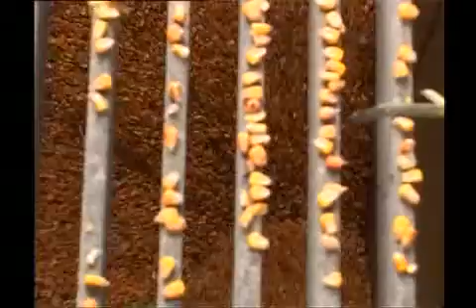Did you know that for more than 10 years, one company has been applying a responsible policy which provides effective responses to post-harvest cereal processing and minimizes the impact of its facilities on the environment, thereby contributing in its own way to controlling climate change?

CFCai, Group CFC, is established in L'Oise, to the north of Paris. Created more than 75 years ago, the company specializes in post-harvest technologies. It currently employs 150 people. Exports account for 30% of the turnover of the company, which is present in more than 70 countries, spread over 5 continents.

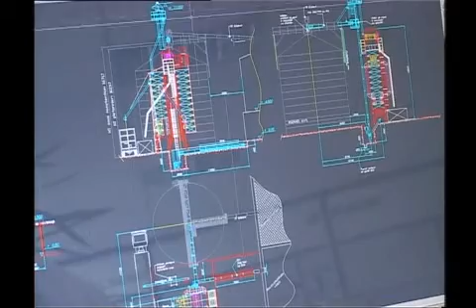Thanks to its in-house design office, CFCai creates all its equipment from design to implementation, without forgetting after-sales service and on-site maintenance. A team of 14 specialist engineers, split between 3 sites, have ensured a close relationship on a daily basis since its creation, responding fully to the requirements of an international clientele.

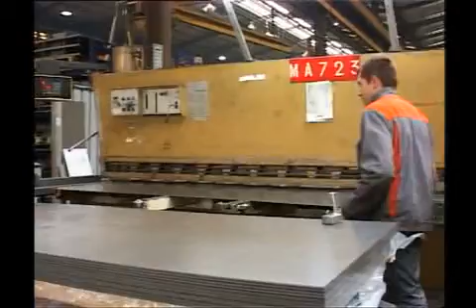Our production site covers more than 10,000 square meters and includes 2 digital control shears with 4-meter capacity, five digital control punches covering a thickness of up to 8 millimeters, six press brakes with 3 to 6 meter capacity, and 1 laser cutter, 8 millimeter thickness, on a 6-meter bench.

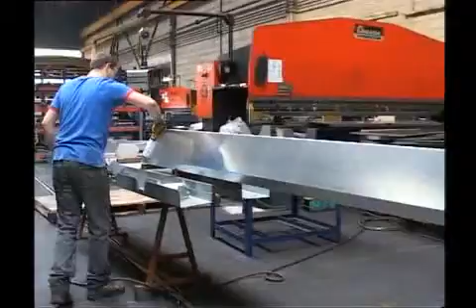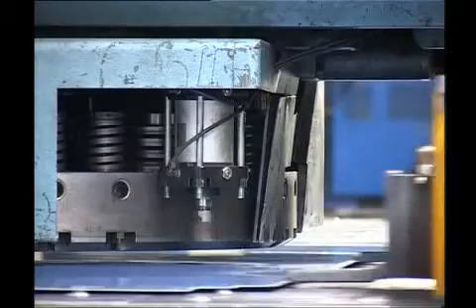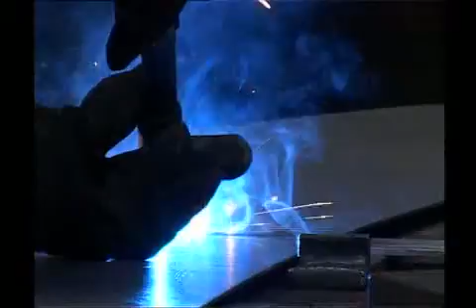Our site also has a TIG-MIG welding line, one grit blasting, pickling, and baked paint line.

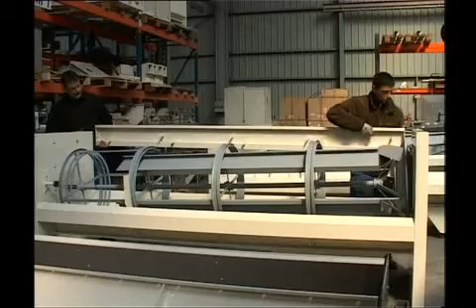But CFCai's know-how does not stop there. The group also has 3 assembly lines at factory outlet, created entirely by its engineers: 1 line specific to the Marot cleaner grader, 1 line specific to the LAW dryer, and 1 handling line.

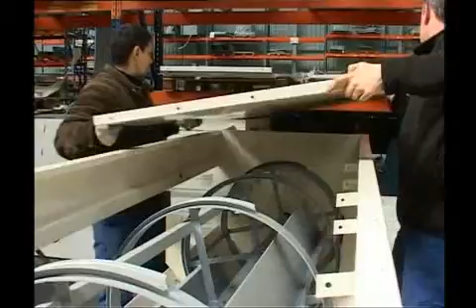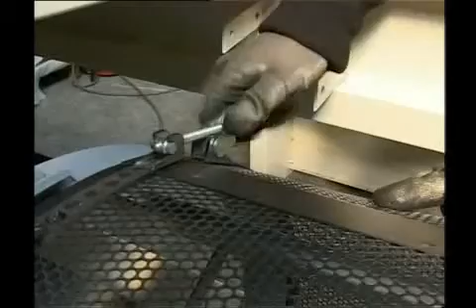Through full control of its production tools, CFCai improves the reliability of all its equipment, which is boosted by the most meticulous quality control before shipment at the end of each line and on each of its machines.

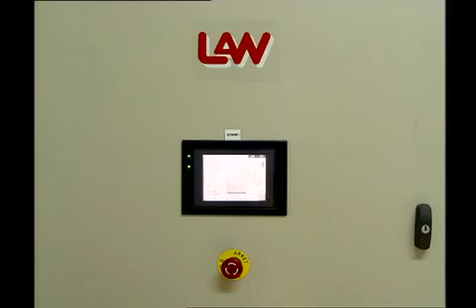To round this off, we can add that the group produces its own automated systems on its production site and offers an upgrade service for its previous facilities.

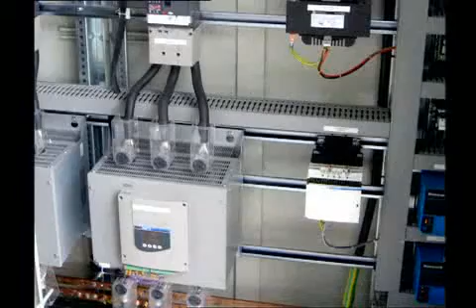Through an operating dryer silo and cleaning training program, which it has introduced, CFCai demonstrates its commitment to providing customers with a quality of service in line with its technological expertise.

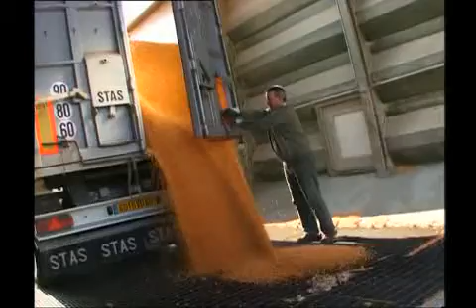Once harvested, the cereals are conveyed to the silo by lorry and tipped into an unloading pit. The lorry is weighed when it enters and leaves the site. Whilst each batch is recorded on computer for traceability, a sample is taken to assess the product's humidity and quality.

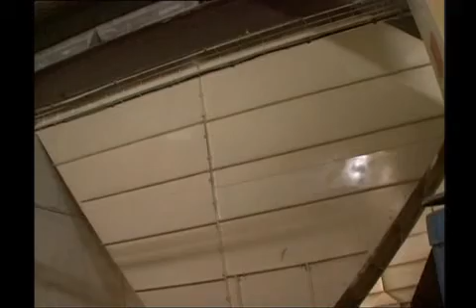The cereals are then taken up by a chain conveyor fitted with centralized suction to evacuate the dust generated by the movement of the grain.

The grain is carried upwards by a bucket elevator, then taken over by a chain conveyor produced by us to fill silos.

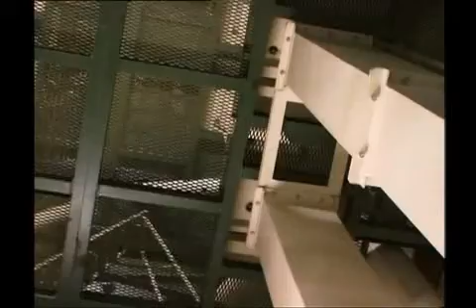Silos can also be filled by a conveyor belt fitted with a dump car.

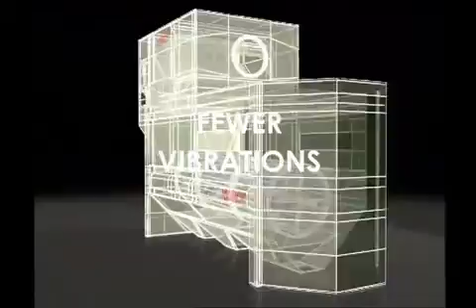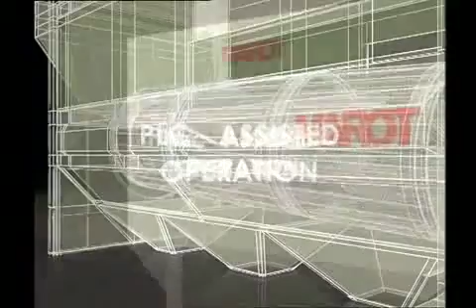Marot has always placed innovation at the heart of its strategic priorities. When designing and developing its third-generation cleaner, the company did everything possible to achieve a level of fittings and finish never before equaled in the profession.

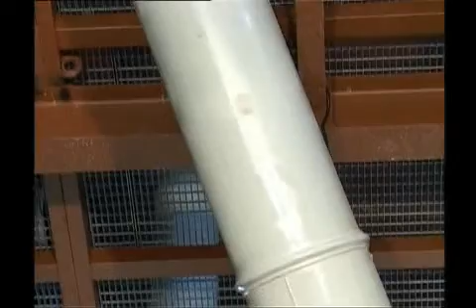The Marot cleaner is based on the latest technological advances. It creates no dynamic loading, which makes its on-site installation easier.

Among its numerous advantages is the extreme precision of its grain curtain, regardless of flow rate. With sensors controlling the opening of the shutter, which relieves the operator of any adjustment constraints, it offers optimum output under all circumstances, regardless of cereal.

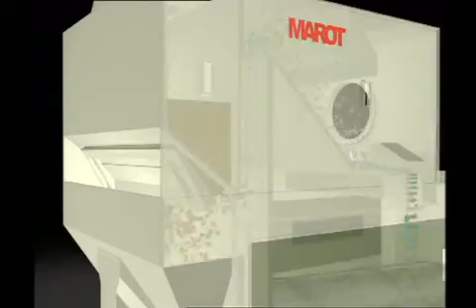Fitted with a feed roller and an automated system controlled by a PLC, the Marot cleaner can function under several operating procedures. The extra-large suction column is unusually efficient.

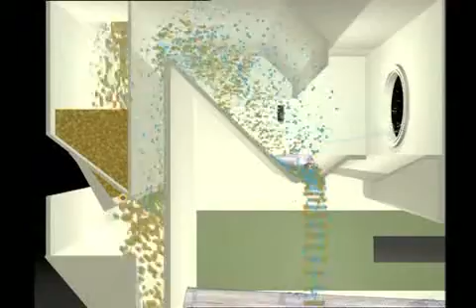The lightweight and semi-heavy grains are separated in optimum fashion by a high-performing letdown chamber. The lightweights are thus expelled by processing with cyclone, filter, or air recirculation. The semi-heavy grains are expelled outwards via a huge Archimedes screw.

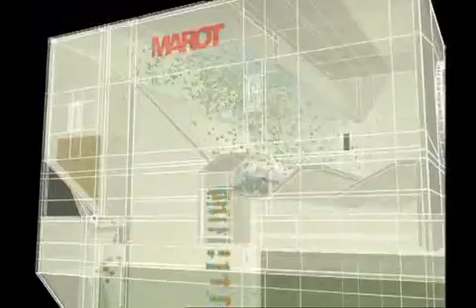The equipment provides for a counterweight valve, which maintains the seal between the letdown chamber and the pipes specific to the semi-heavy waste.

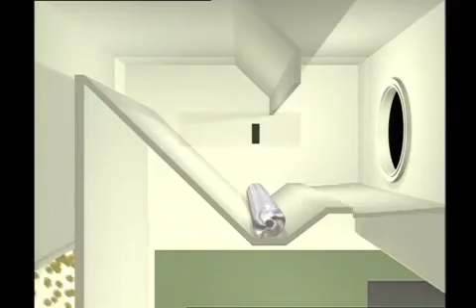The power level, which can be adjusted by a bypass from a remotely aided and controlled PLC, is used to maintain a constant flow rate in dealing with dust.

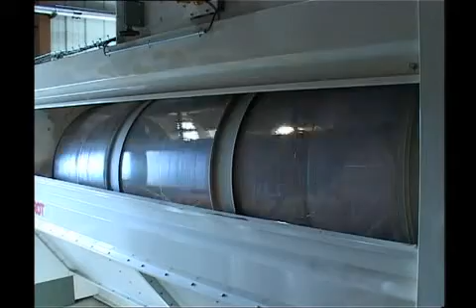Another groundbreaking feature is the dimensional sorting obtained from grids specially designed in our factories. With a high perforation coefficient, they thus supplement the suction system, the heart and lungs of our system.

The Maho rotating system, a product of our research and development department, is the ideal solution to meet the expectations of a most exacting international clientele.

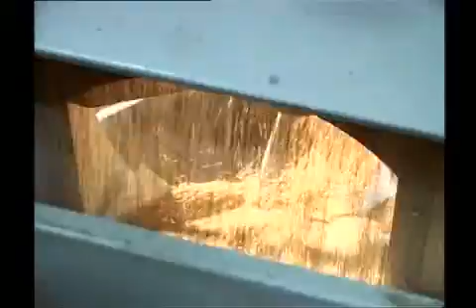Recognized for its efficient cleaning of particularly difficult products such as damp maize or sunflower prior to drying, it processes coffee, cocoa, wheat or soya with the same degree of efficiency.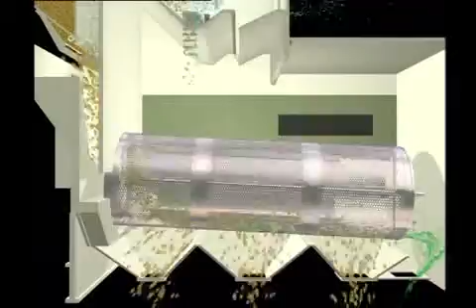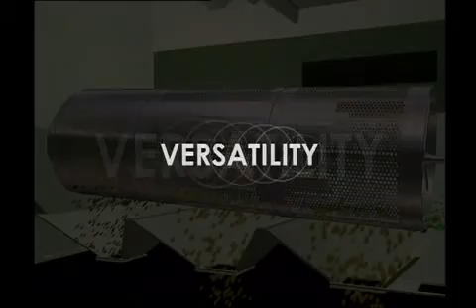A totally new rotating system with multiple applications, also capable of grading all other granulometric products. Versatility of our system means numerous options, from power suction cleaning to seed calibration via cleaning grading.

To improve the surface area in contact with the grids, the engineers have designed shoveler blades which stir constantly. Grids which can easily be interchanged, offering several options.

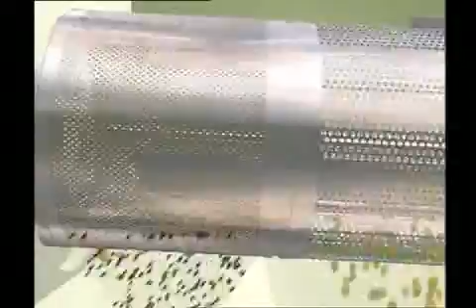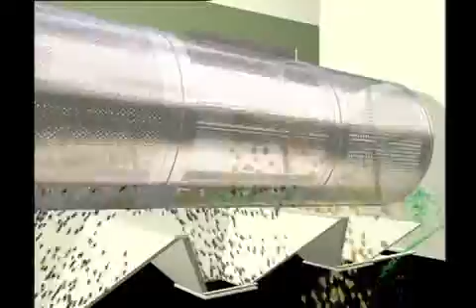Traditional cleaning with one grid for dividing and two for scalping. Seed cleaning with two grids for dividing and one for scalping. Barley grading with all the grids for dividing. In this case, the quality products are evacuated through the end of the cylinder.

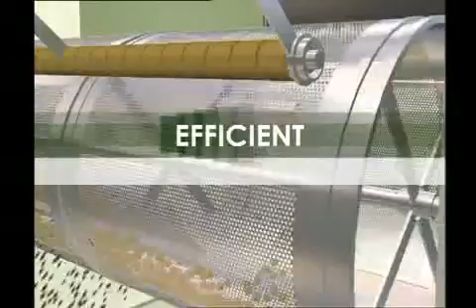Declogging rollers push any grains into the upper part of the grid and force them to fall into the cylinder. This keeps the grids unclogged at all times.

Versatility, precision, traceability, profitability, all features which have persuaded Marot to introduce a management and decision-making PLC. Grain curtain control and management, suction instrumentation and control, help in selecting grids, optimizing cleaning quality by managing flow rates.

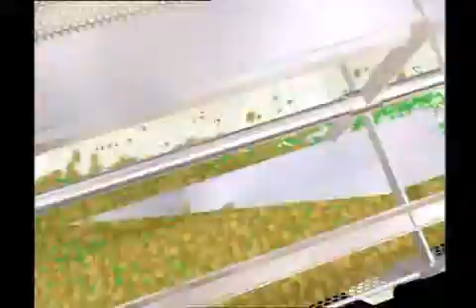The major strength of this PLC lies in its ability to manage the rotating speed and the tilt of the cleaning shoe slope simultaneously, which increases the working surface of the grids substantially. The Marot cleaner, equipped in this way, currently has a unique level of cleaning efficiency in the marketplace.

Let us now examine together the effects of two cleaners without automatic control system to assess this technological advance better. Scenario 1: the flow rate is too fast. It is thus impossible in identical configuration to sort all the grains effectively.

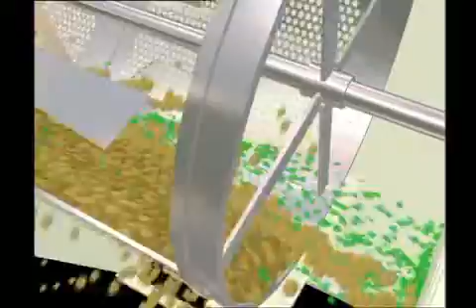Scenario 2: the cleaner's flow rate is too slow, which immediately lets waste through the grids.

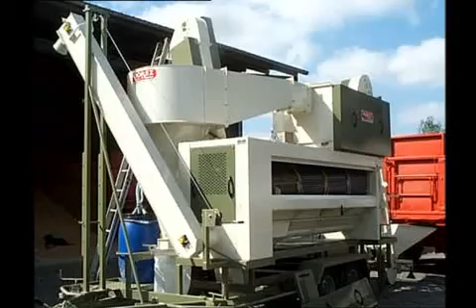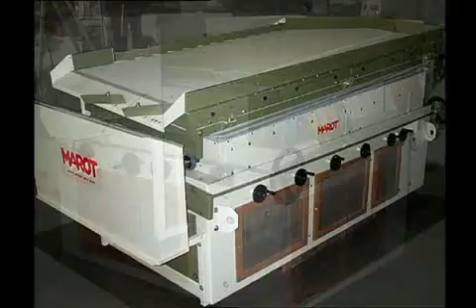And yet, Marot's know-how does not stop there. Other post-harvest solutions supplement a range governed entirely by innovation, including the indented cylinder seed grader, the density separator, the special coffee and cocoa grader, the dust removal box, and the movable seed station.

We have developed and perfected two advanced dryer technologies in response to our customers' requirements. The Lav dryer with static vacuum pressure and dual temperature technology fitted with two burners. And the Lav vacuum dryer fitted with a single burner and a mixer to obtain two temperature levels.

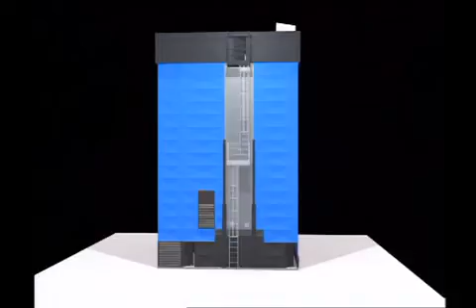Fully galvanized and insulated with glass wool, the Lav multi-cereal dryer, which can process soya, maize, coffee, cocoa, sunflower, rapeseed, and many other seeds, is simple to assemble and use, upgradable, and multi-energy.

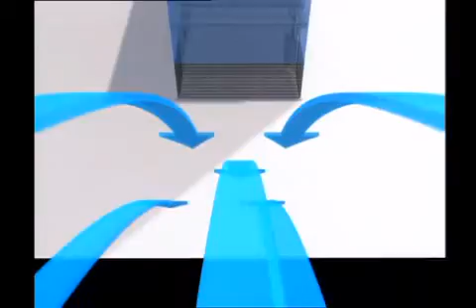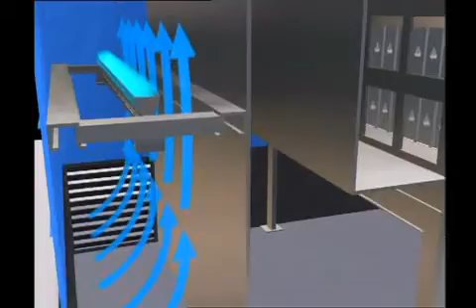The fresh air from outside, heated by a burner, is distributed uniformly through the drying bays.

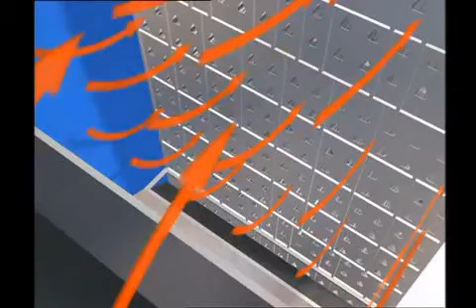The upper air is saturated with humidity after passing through the grain. It is pushed through filtering media and expelled outside by high fans.

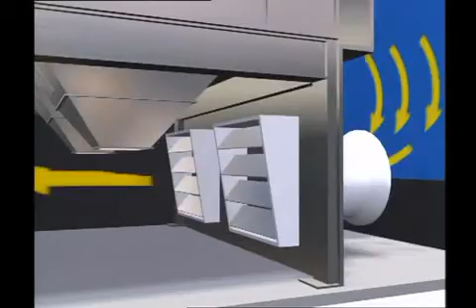To save energy, our dryers are fitted with an air recirculation system passing through low fans towards a dual-flow mixer air heater before being distributed once more to the drying bays.

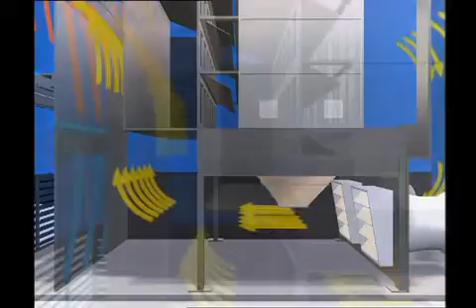The additional adjustable fresh air inlets at the bottom of the dryer cool the grain.

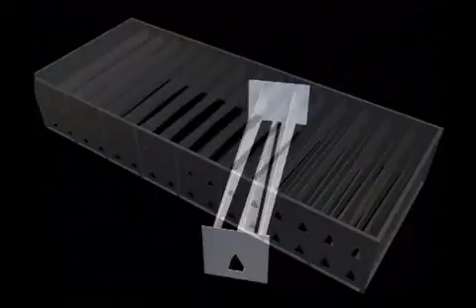The drying ducts, open on one side and closed on the other, let in the warm air passing through the grain.

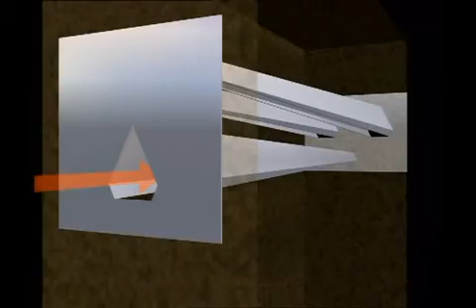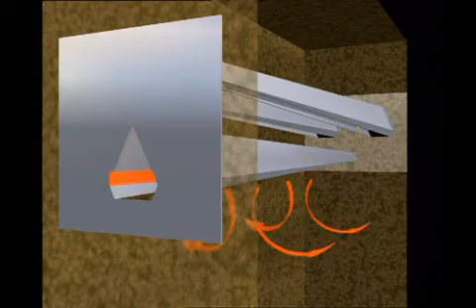Saturated with humidity, this air comes from a duct located above or below the warm air duct before being evacuated towards the condensation chamber.

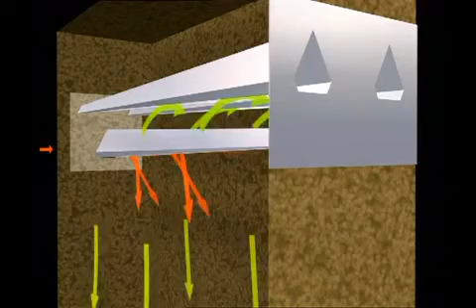For improved filter efficiency and effective unclogging, dust-proof shutters in the upper and lower part of the dryer open and shut every time grain is extracted.

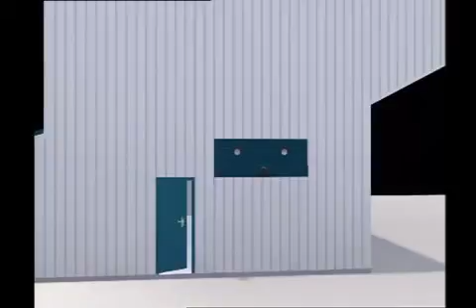Other technology, other know-how from CFCai, the CFCai technology dryer. Like the LAV technology dryer, the CFCai dryer is exceptionally well equipped and finished.

Designed specifically for very large drying capacities, the CFCai technology dryer has 2 burners, 2 temperatures, and a fully modular expandable structure.

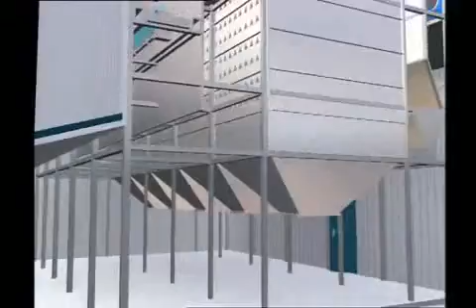This multi-fuel equipment can dry up to 6,000 tons of cereals a day and receives well-deserved recognition from the largest international cereal growers.

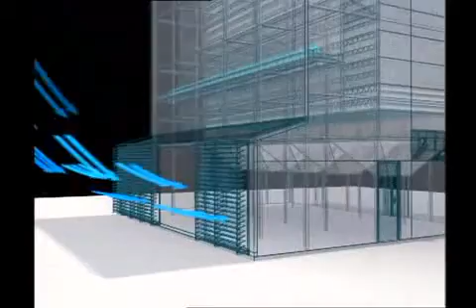The air from the outside is heated by the low burner.

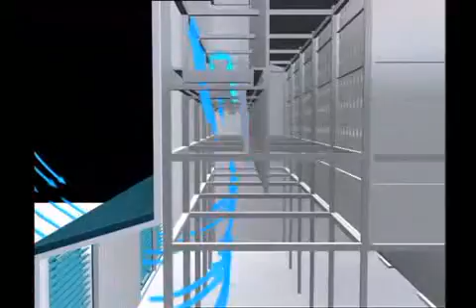After passing through the grain, the air then goes through a fan, which pushes it towards the upper burner.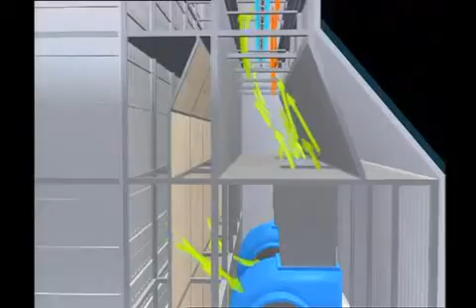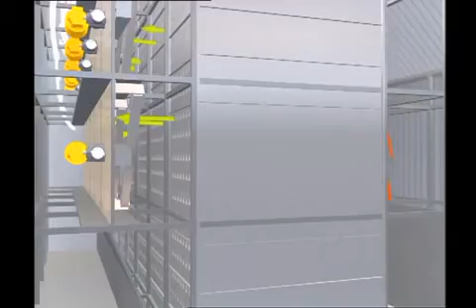This air passes through the grain a second time before ending up in filtering media for evacuation outside, with all dust and large particles removed.

Designed and perfected by the CFCai Group engineers, this technology not only saves tremendously on energy, it is also environmentally friendly.

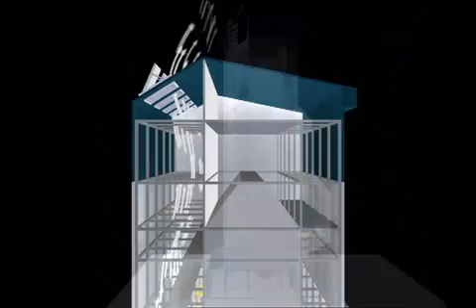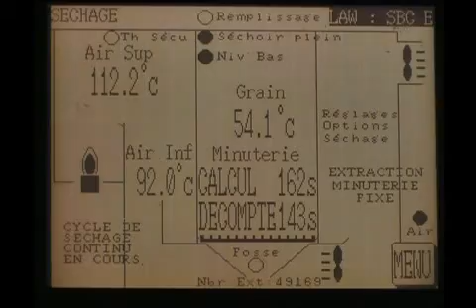A fully automated control system is in operation, including permanent temperature monitoring from a touch screen. This system can be supplemented by a supervision post built into the dryer, allowing the operator to control his or her facility remotely and store histories and methodology.

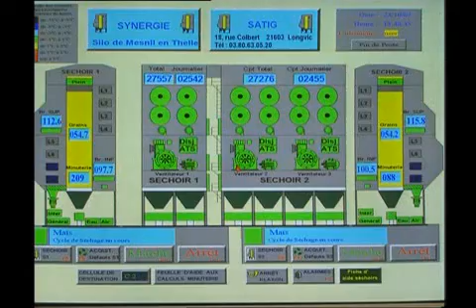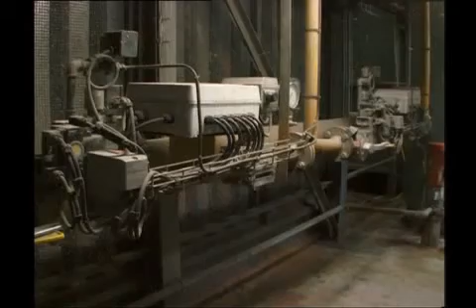Our installations are fitted with gas regulation consoles in compliance with safety standards. Gas and burner regulation consoles may be replaced with heat exchangers to meet the specific needs of certain customers.

Our entire dryer range is secure and can be fitted with a standpipe with fire hose and an automatic soaking system upon request.

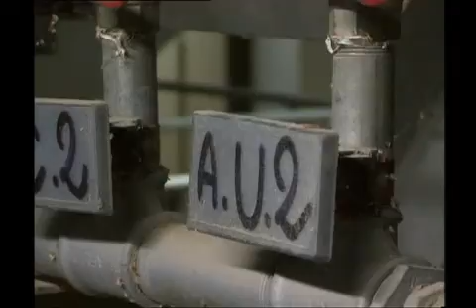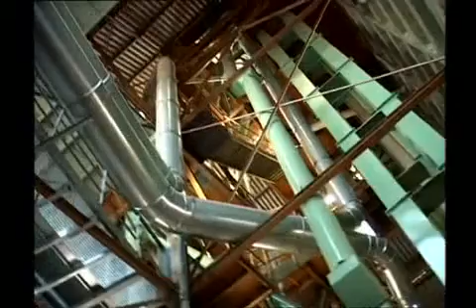Nearly a century has passed between the first cleaner leaving the Maho factory and the third-generation LAW dryer, spearhead of the CFCai Group know-how. So many years devoted entirely to the research and development of grain drying equipment.

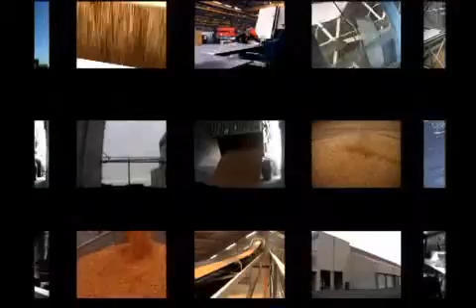The group not only seeks to break new ground, it is also conscious of the issues of sustainable development. Its everyday challenge: produce with equal efficiency whilst minimizing the environmental impacts.

Boosted by its commitments, CFCai has eco-facilities on 5 continents. It is not just chance that has made the group today's reference in post-harvest technologies.